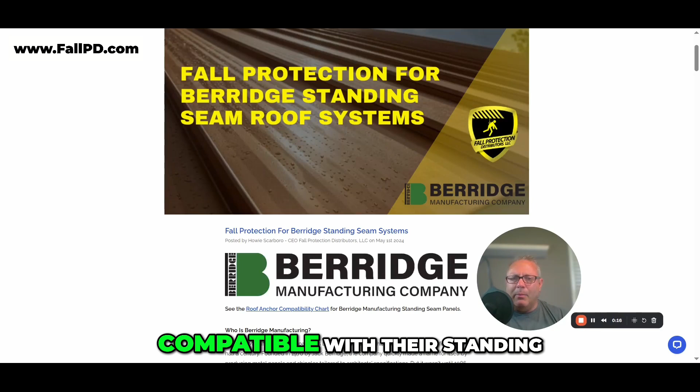The one I want to point out to you is the one that is not very compatible: the T-panel, high seam. It's not compatible because it has this batten strip that covers the seam. You don't want to attach seam-mounted anchors to a batten strip, because if the batten strip were to break free, it would just slide down the roof along with the equipment and the workers if there was ever an accident.

As you read through this article, you'll see there's links to the roof anchor compatibility chart. It's a reference guide, and the different panels are across the top. As you can see, that seam I just showed you is the first one. These are seam-mounted anchors, and these are adapter plates that work with those anchors. Those are not compatible with the T-panel.

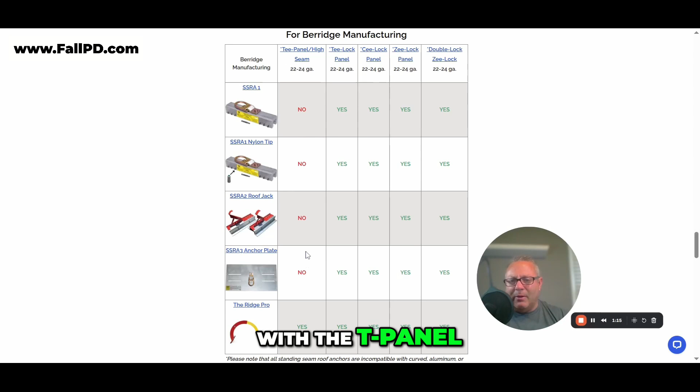However, we do have an alternative product we'll talk about here in just a minute. The SSRA1 is our base product. This is what locks onto the seam with 12 non-penetrating set screws.

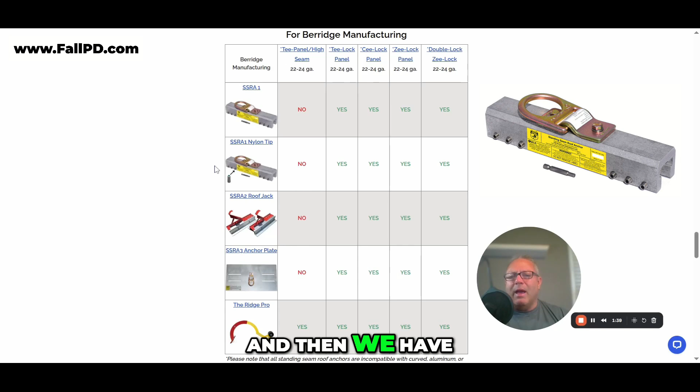We have two different types of screws. We have a standard SSRA1 cup tip screw - that's an all stainless cup tip screw, non-penetrating. And then we have an SSRA1 nylon tip version, which the only difference is the set screws. That has a nylon bushing in the tip, and it's just a softer bite on the panels.

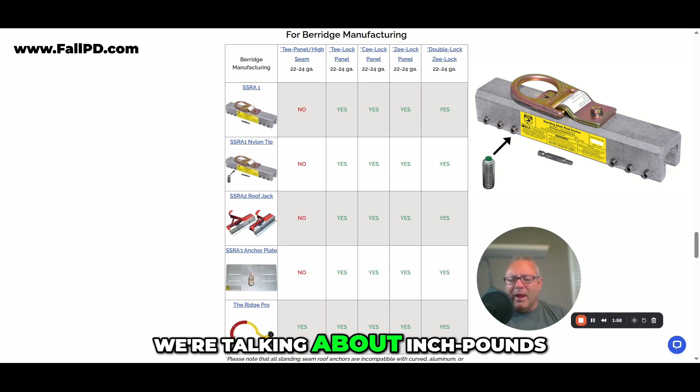With the cup tip, we're going to torque to 90 inch-pounds. With the nylon tip, we're going to torque between 180 to 200 inch-pounds. Please note, we're talking about inch-pounds, not foot-pounds. So it's 90 inch-pounds, then 180 to 200 inch-pounds on the nylon tip.

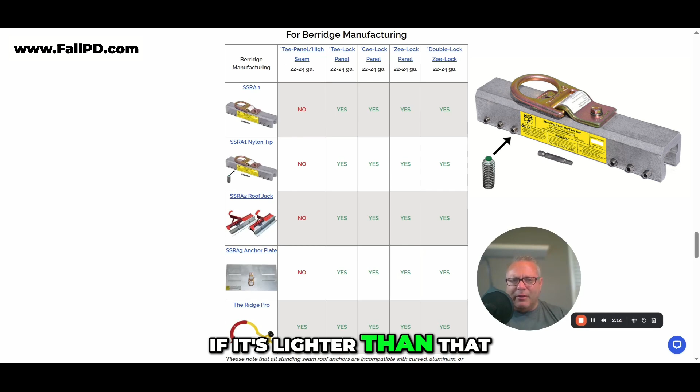When we're attaching to the seam, we want to be on steel panels, primarily 22 and 24 gauge steel. If it's lighter than that, in other words 26 gauge, 29 gauge, those are lighter substrates - aluminum, zinc, copper, these lighter, softer materials.

If you need to run 10-foot walkboards, if you've got a steeper roof, you need to have stable, level footing for your workers, then you can go to the adapter plates - the SSRA2 roof jack adapter. This is a walkboard adapter that's going to mount on top of the SSRA1 anchors.

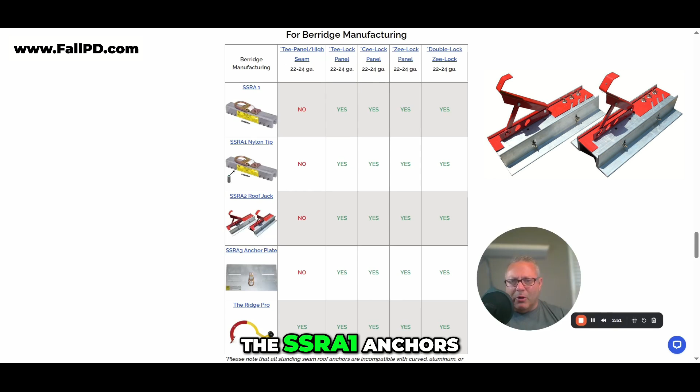You're going to remove the D-ring off the anchors. You're going to mount them about 8 feet apart on seams. You can run a 10-foot wooden walkboard. So you would need two SSRA1 anchors and a pair of SSRA2 roof jacks to mount one 10-foot walkboard.

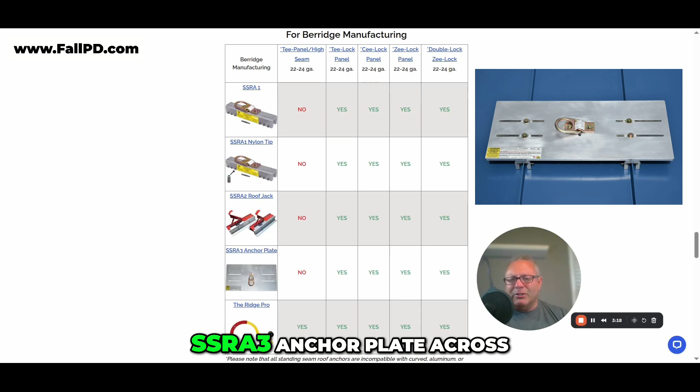If you're on a roof system and you need maximum worker mobility, you want to use a temporary horizontal lifeline system, you can mount the SSRA3 anchor plate across two SSRA1 anchors. Again, two anchors, remove the D-rings. Those would be on parallel seams. The SSRA3 anchor plate would mount on top of those two anchors, and that is seam width adjustable from 12 to 24 inches wide - so very universal fit.

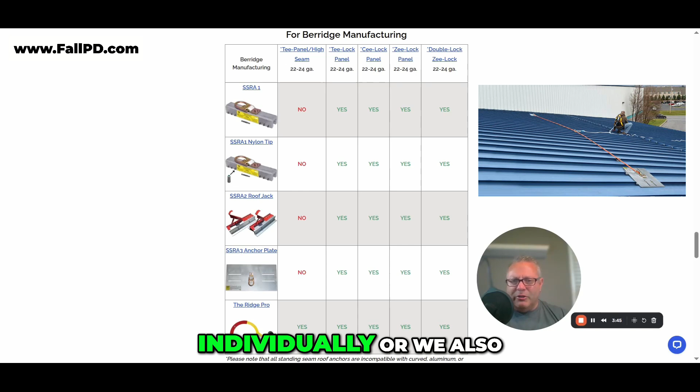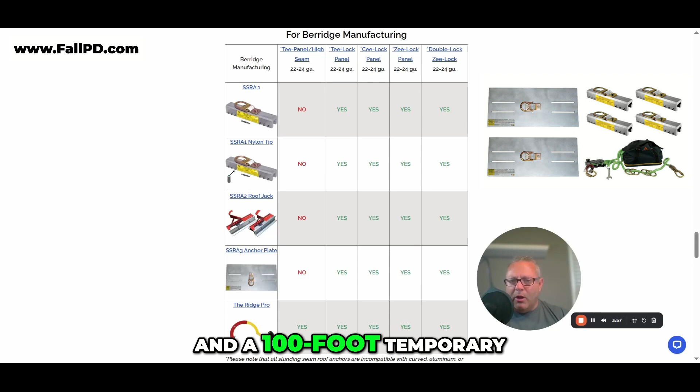You would have one of those assemblies, two anchors and an anchor plate, at each end of your rope. So we sell these parts individually, or we also sell a kit called the SSRA HLL kit that includes 4 SSRA1 anchors, 2 SSRA3 anchor plates, and a 100-foot temporary horizontal lifeline rope.

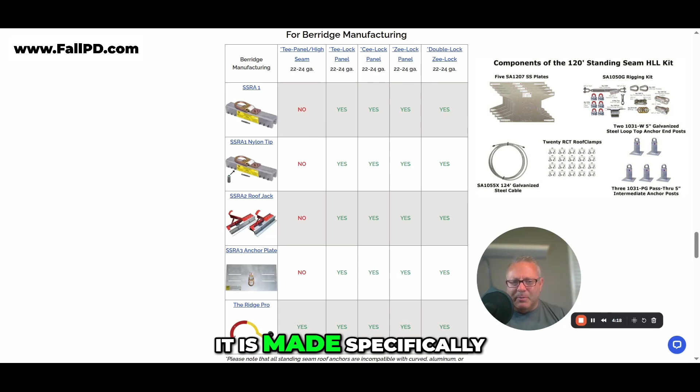If you think you might need a permanent horizontal lifeline system, galvanized steel cable system, we also offer an industry-exclusive 120-foot system made by Super Anchor. This includes your riser posts, your plates. It's made specifically for standing seam roofs, but there's another product, the Ridge Pro, which is a unique product.

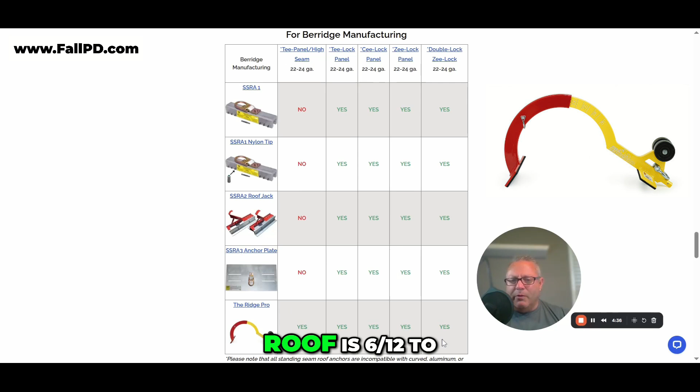This is compatible with almost everything. As long as the roof is 6/12 to 12/12 pitch, the Ridge Pro is compatible with almost all types of roofs - shingle, metal. The way this works is it mounts on the end of a 16-foot pole. A worker climbs the ladder, uses that 16-foot pole to run the Ridge Pro up the roof, flips it over, it locks over the peak, and as it goes up, it brings a vertical lifeline with it.

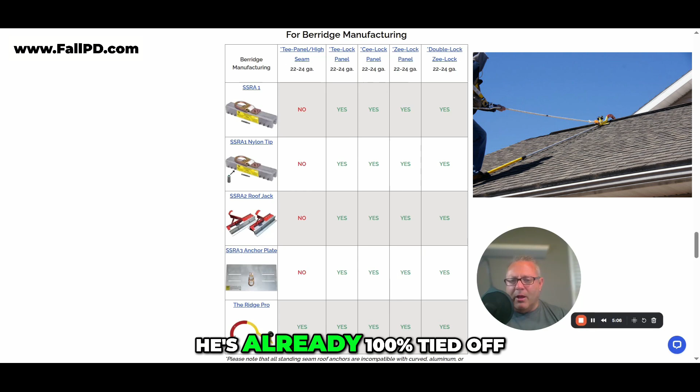So as soon as the worker steps from the ladder to the roof, he's already 100% tied off. He can do his work, his inspection, hang his Christmas lights. Until he is safely back to the ladder, he's tied off the entire time - there's no exposure. Once he's safely back on the ladder, he can use the pole, release the hook, get it safely to the ground.

Ridge Pro is a very versatile product. We sell a ton of those as well.